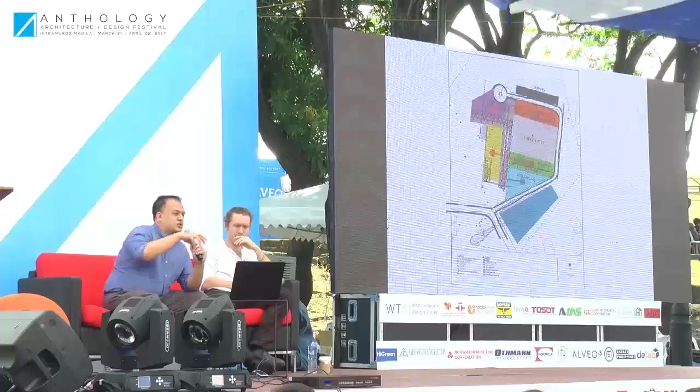At the same time, there was also a very clear intention to create a portion which the larger community of Tagpuro would be able to be involved in. So we had to balance this idea of creating a protected internal space with an external connection to the city at large.

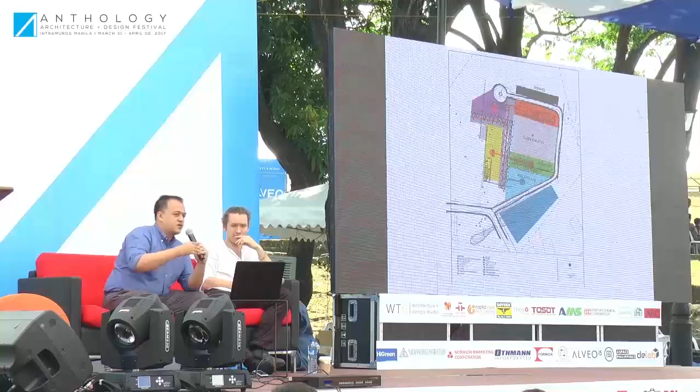Moving on now, going into details and building up on this idea of the heavy volume with the light frame, the ventilated frame, and this idea of what is secure and what is open. We created some studies trying to analyze the heavy volume and the light frame and how it can interact to create an architectural framework by which we can layer on different concerns or affordances. As architects, we'd always like to think that we want to put considerations about lighting, ventilation, earthquake or typhoon resilience, and also materiality or honesty and these other values which we intrinsically understand.

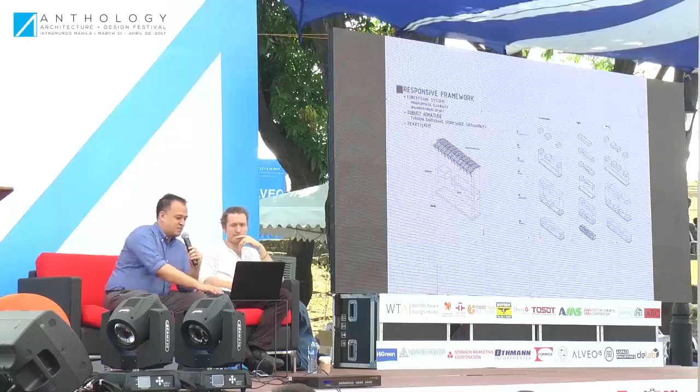Given the number of volunteers that we had at the firm, a lot of really passionate people wanting to be part of it, we did our own internal schematics of how we translate this idea of heavy volume and a lighter frame. The diagrams studied the configuration of the roof, configuration of the skin, how it's related to the program, and how it relates to affordances in terms of an inside and outside connection, and many other things.

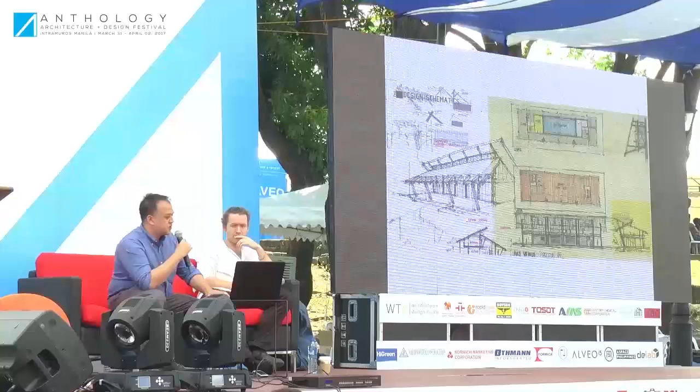These are some of the studies which translate that concept into various architectural translations. What is clear here is that there is still this language going through of that heavy concrete solid volume and that light frame. There was also a clear intention of trying to adapt it to what we felt was a more humanly scaled architecture and a more locally sensitive construction method. These are some of the studies, just a summary of how it all looked.

At some point, of course, we went a bit too wild, I think, in creating dome structures and all that. But you can see that all of these have...

We're back. Oops. all right, on here. Yeah, I have no jokes. It's okay. Okay.

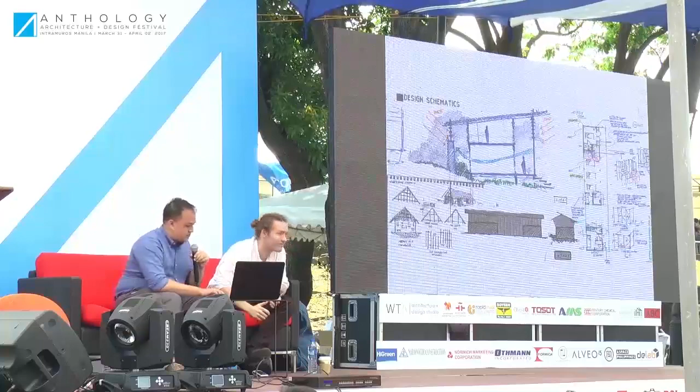I'm just going back, showing the roof structure. Yes, we went a bit wild, of course, but that's to do with how we wanted the architecture to reflect typhoon sensibility and how it relates to construction method as well.

We also did wind studies to analyze how the structure behaves in different wind conditions. We had to consider that basically the light frames would be open so that the typhoon can pass through. So instead of trying to fight with the typhoon, we're using it passively, allowing it to go through the building. This was a concept that we had from before, that had happened because we learned from the previous building.

We also had to do studies about how the building had to be scaled for using the materials in terms of how it's constructed, and how it relates to the natural tendency of materials to have certain limits. We also wanted to suit the construction method to the construction capability of the people that would have been there at the time.

We had a lot of design sessions internally. We made scale models, we had meetings, and a lot of discussions about the site planning, how it relates to the architecture and the community, and everything else.

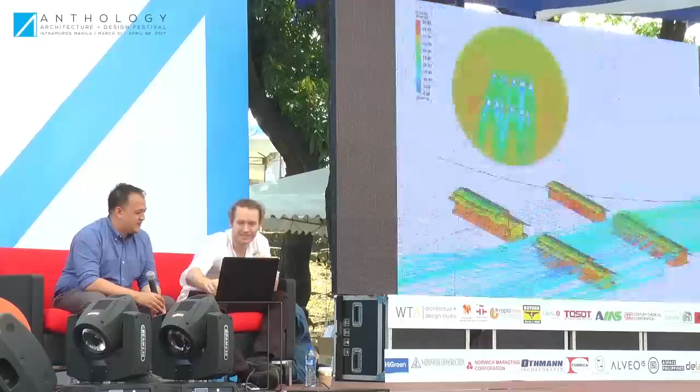And once we had an idea of what we're doing, this principle of the heavy and the light, we had this checked by our engineers. Maybe you want to continue.

We felt like we had to really test the idea we had learned from the start, to make sure that if we intend for the typhoon to pass through the buildings, that it would actually work. What we found through simulation is that it does work, and it confirmed our initial gathered knowledge from the site - that the strategy of opening the buildings for the typhoon really does work.

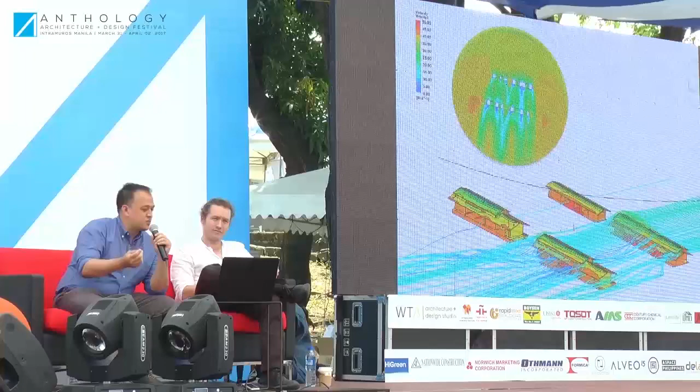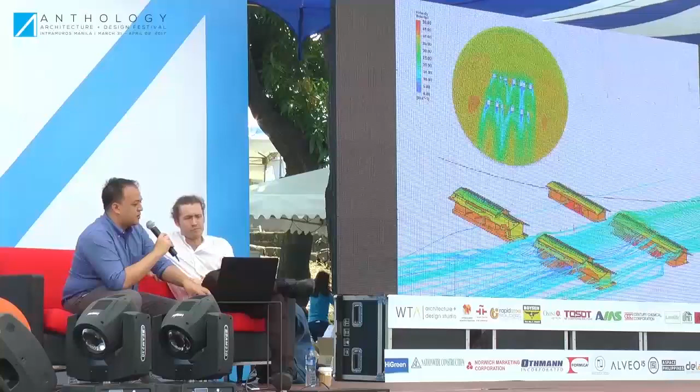Just to add to this - when developing the language we were designing together with the community, that language needed to have variety as well. So although in the orphanage the building is two-story, what happens when it becomes one story, and how can we make that switch quickly when we get to the stage of making decisions?

The office is a mix of both - it's both one story and two story.

I think what Alex was trying to highlight is that the framework we conceived of at the start was flexible enough to become adaptable to different site conditions and different programmatic conditions. That was a clear, very intentional and deliberate act on the part of the design.

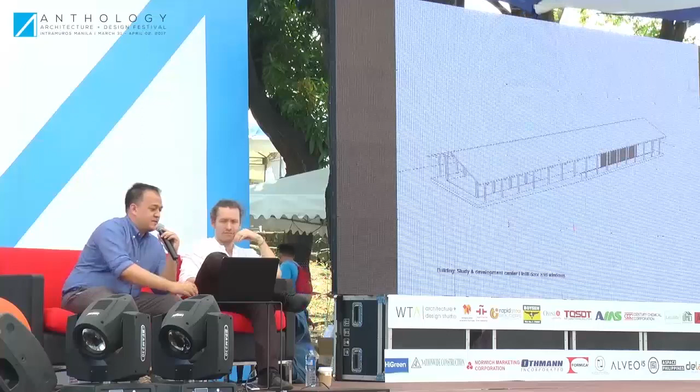Moving forward, we'd like to discuss a little more about the architectural details of the different parts of the building, so we start off with the roof.

What was interesting about the roof was we did a standing seam batten roof, where the material comes half-formed, and we site-form it and adapt it onto the roof. The idea was that we wanted to allow the fathers of the community to participate in the construction of the building, to gain more ownership of it in the process.

Next, the architectural tectonic quality of those blocks. We used shear wall, basically reinforced concrete boxes to create those frames, and we cut out windows onto them. That creates a really clear sense of strength and stability, and it contrasts with this idea of the lightness of the frame.

At the same time, the idea of concrete has a lot of material potentialities, which we found, and we decided that to express that, we wanted to simply grind the concrete down and expose the aggregate. That becomes the architectural quality of the concrete.

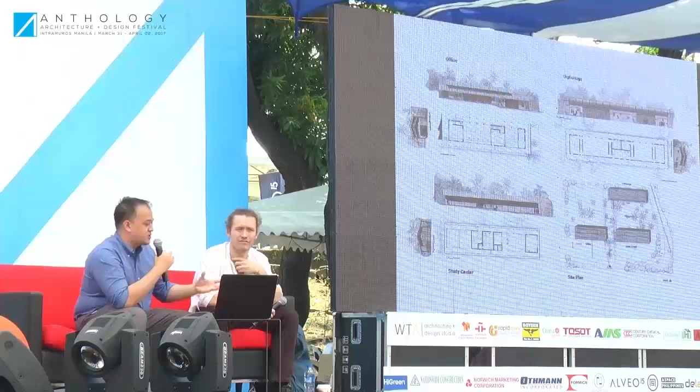I think maybe you want to explain the plans? It's okay, we'll just show basically these architectural drawings that we had explaining the site. We can see the finalized site plan on the lower right-hand corner. Basically we have the office, the orphanage, and the study center all mixed up, sort of located onto the site this way. The intention was really to try to create a protected corridor, protected spaces, and a connection to the exterior as well. I think we achieved that architecturally and in terms of the site plan, and how it relates to the community interactions on a larger scale. So we'll just take you through the pictures of the finalized building.